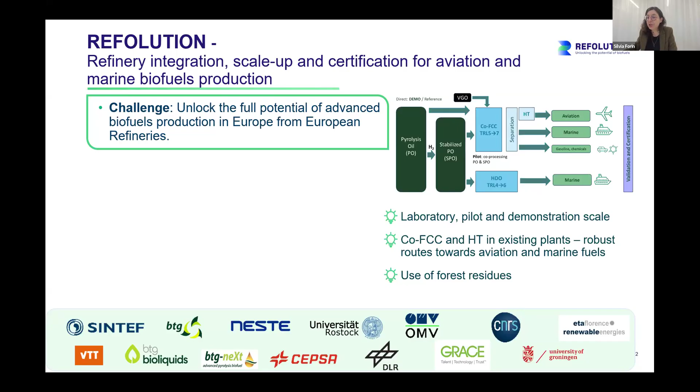These processes are tested in the project at lab scale, pilot scale, and demonstration scale. These different steps of production development are reflected also by the different project partners involved: a total of 14 stakeholders, universities, research and technology organizations like VTT and SINTEF, startups, and established players in the field, for a total of 8 EU countries represented.

The advanced biofuels developed in REFOLUTION are expected to have significant impact on sustainability, enhancing circularity and social acceptance of biofuels. The quantitative targets are to reduce the CO2 footprint by 60% and make advanced biofuels more cost effective by 50%.

VTT, in our work in REFOLUTION, supported these targets. First of all, we engaged in a responsible research and innovation process in which we involved societal stakeholders through information events. After this, our more technical work refers to the calculation of the environmental impacts of the developed biofuels, which also serves as an input for creating a sustainable business roadmap for advanced biofuels.

But which environmental aspects should be accounted for when we talk about sustainable fuels? Or put another way, what is biofuel sustainability? To find this out, we asked the REFOLUTION project partners and company stakeholders about their perception on regulations and on environmental aspects that are relevant in this sector.

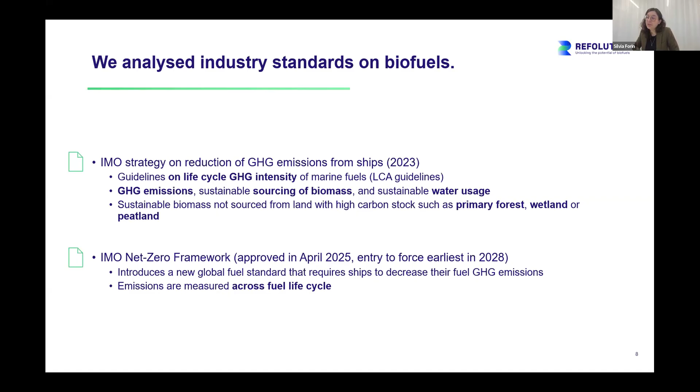It focuses on GHG emissions, sustainable sourcing of biomass, and sustainable water usage. It also explains that sustainable biomass shouldn't be sourced from land with high carbon stock, such as primary forest, wetland, or peatland. The newest framework is the IMO Net Zero framework, approved last year, but will probably enter into force only in 2 years. It introduces a new global fuel standard requiring ships to decrease their fuel GHG emissions, measured across their whole life cycle.

Besides very specific regulations and standards, we considered sustainability legislation in general and the role biofuels play. We looked at the Renewable Energy Directive, number 3, which establishes life cycle GHG emission saving criteria for biofuels and acknowledges risks such as land use change, deforestation, biodiversity loss, and risks to food security.

Important also is the EU regulation on deforestation-free products, which establishes sustainability criteria relevant for biofuels, bioliquid, and biomass fuels produced with forest biomass, as is the case in the REFOLUTION project. It explains there shouldn't be damage to biodiversity, soil quality, or long-term production capacity, and that forest regeneration must be guaranteed. It also sets a privilege for advanced biofuels from forestry waste and residues, and has social compliance targets and governance criteria such as land use rights, forest management, human and labor rights, and the rights of indigenous people.

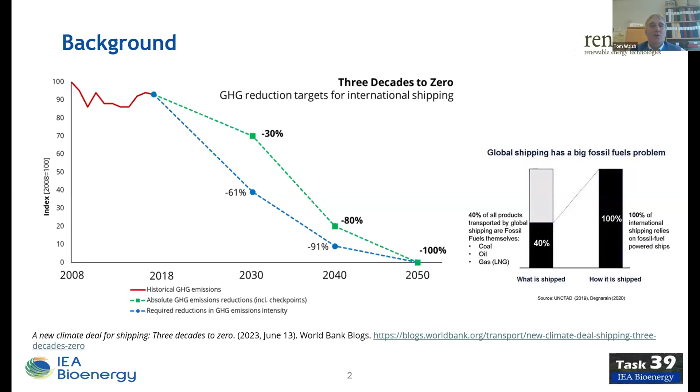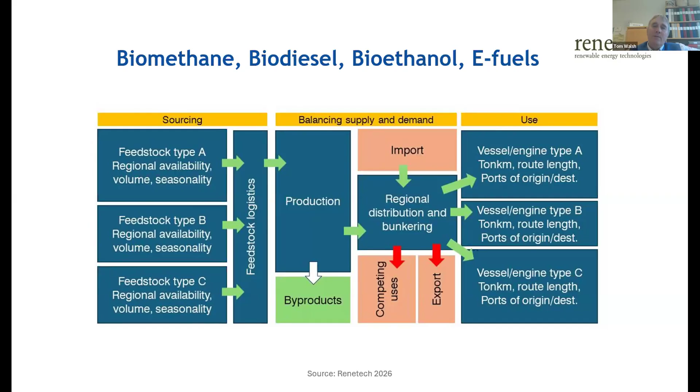And then finally, in terms of use, the maritime sector has different engine types. So you can use drop-in fuels. You have LNG ships that are geared towards the biomethane environment, but you also have heavy fuel oil, which is more considering the drop-in fuels.

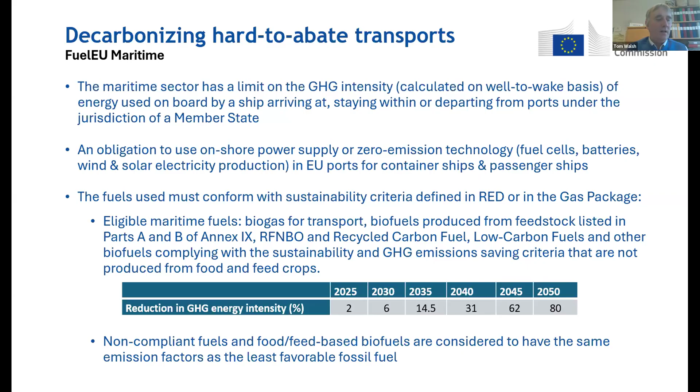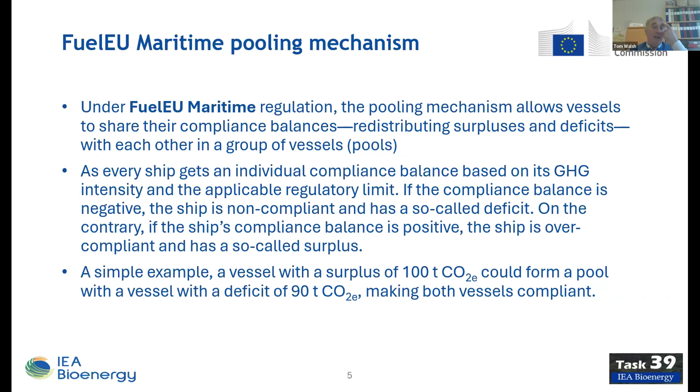Non-compliant fuels and food-based biofuels are considered to have the same emission factor as the least favorable fossil fuel. There is a pooling mechanism in the FuelEU maritime regulation, which allows vessels to share their compliance balances, redistributing surpluses and deficits. So as you see at the end of the slide, from a simple example, if one vessel has a surplus of 100 tons of CO2 and another vessel has a deficit of 90 tons CO2, they can combine the two vessels and make those vessels compliant.

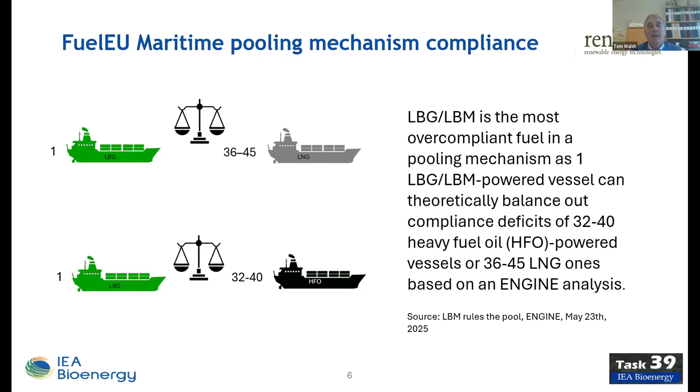This is showing it in another format - if there is a ship that is running on liquefied biomethane or liquefied biogas, it can provide compliance for 36 to 45 vessels running on LNG, or a similar figure for HFO, heavy fuel oil, which is 32 to 40. So this is what a lot of the vessel owners and fleet owners are working with at this particular point in time, and those fleets can go across different owners of fleets in order to meet the compliance.

And then, of course, we have to consider what is an advanced biofuel as well, as part of the energy directive - different feedstock types as listed in Part A of Annex 9 of the Renewable Energy Directive. This mainly includes lignocellulosic material, non-food crops from severely degraded lands, and intermediate crops. Then also residues like animal manure, sewage sludge, and different types of wastes and residues, which obviously would be going into the biomethane value chain.

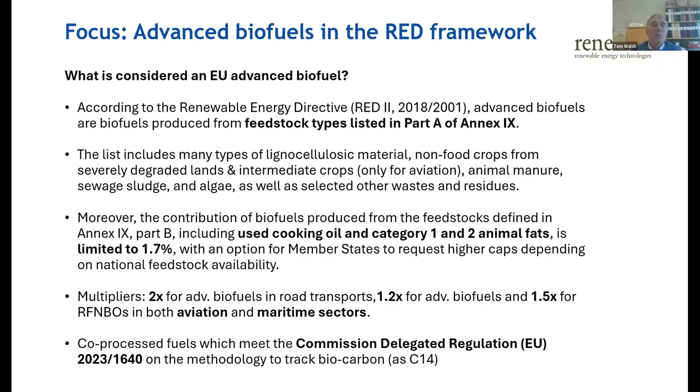So we can also consider feedstocks in terms of used cooking oil and category 1 and 2 animal fats, which would be coming from the rendering industry and also the cattle industry, sheep, pigs, etc. But this is limited to 1.7%. In terms of multiplier effects, renewable fuels of non-biological origin in both the aviation and maritime sectors do have a multiplier effect of 1.5 in the case of the maritime sector.

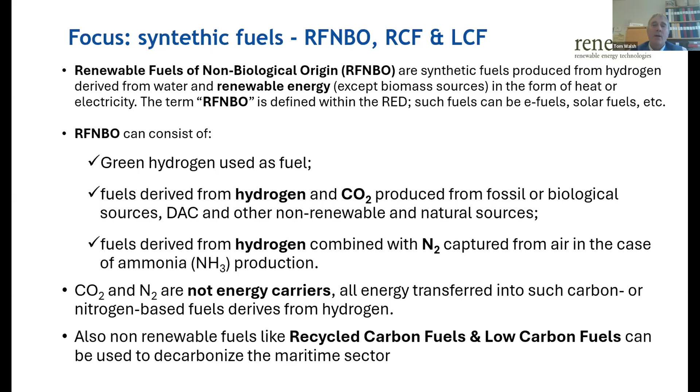They're renewable fuels of non-biological origin, and this is also a factor which is under development now. Probably we would consider it in terms of beaker to bucket to barrel to bunker. It's probably moving into the barrel area, with lots of project development happening for different facilities, and the combination of hydrogen and biogenic carbon. We can see that particularly in the methanol area - green methanol - that is an area that's developing quite rapidly.

Just to take those regulations into account, it's important to remember that this is a size of production and size of innovation scale for the maritime sector. It's beaker to bucket to barrel to bunker, and obviously the bunker area, you don't have that in every port. Some vessels, a lot of it happens in particular ports where the bunkering actually happens.

In the maritime sector, we're using 300 million tons of fuel on an annual basis globally. We need something like around 30 million tons of alternative fuels by 2030. We should also bear in mind that in terms of greenhouse gas reductions, energy efficiency is an important factor in terms of IoT, green corridors, and also slow steaming, etc., all of which reduces the usage of fuel and can actually make the vessel compliant.

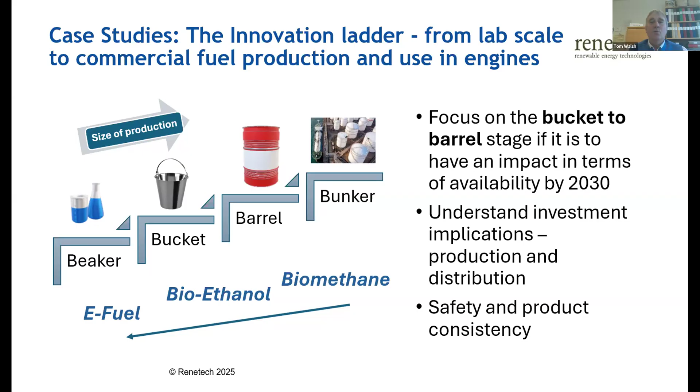There is still a lot of research going on in the beaker to bucket area. This is particularly like e-fuels and so on, but also other fuels. Bioethanol is not used extensively in the maritime sector, but in terms of scalability and availability, it has huge volume.

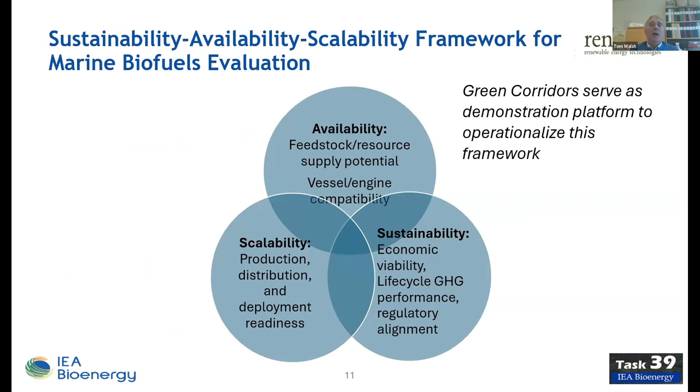Just to mention some of the areas to look at from a maritime biofuels perspective, you have sustainability, scalability, and availability - the SAS framework - and this is typically being implemented in the form of green corridors.

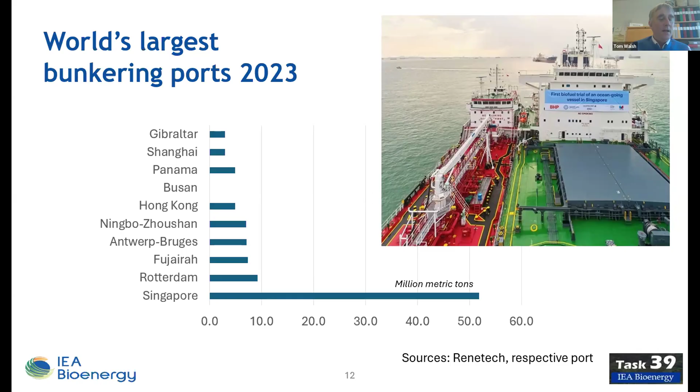To conclude, green corridors are an implementation mechanism for getting more green transport, and there are green corridors already implemented which are moving from Singapore to Rotterdam and other areas. This is a good mechanism to allow both the use of energy efficiency measures and alternative fuels from an implementation perspective.

Next slide, please. I'm talking about methanol in marine use. Next slide, please. To start with, let's see the whole picture, what is happening in fuels used globally, and then what is needed in the maritime sector. Today, fossil fuels are produced, composed quite much of methane.

If we think about these alternative fuels, methane is the dominating fuel, and this includes also biogas for energy production. If we look at the current bio and electrofuel production volumes, ethanol is dominating with 84 megatons produced. Then FAME, biogas, and renewable diesel. Ammonia and hydrogen are almost non-existing, while methanol is relevant at around 8 megaton production volume.

The prospects for 2030 are quite huge when compared to the current volumes, especially for ammonia and hydrogen - they should grow really fast. What is used today in maritime fuels, the biofuel that is used most is biodiesel and renewable diesel, but less than 1 megaton, so that is not much.

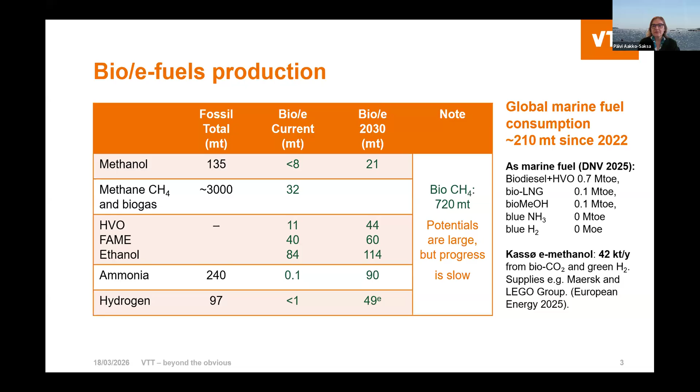And when coming to methanol, I would show you one innovative process to produce methanol in combination with methane. There was the UP-TO-ME project led by VTT, which got funding from a Horizon call for breakthrough technologies. Here is an example of a process where biogas is produced from a wastewater treatment plant, but it could be any biogas. Biogas contains around 20% CO2, and in this concept, methanol would be produced from the CO2. This concept was autonomous, self-optimizing, and compact technology.

And what comes to methanol use in maritime, everything is ready. The fuel standard, including 3 different methanol grades, was published in 2024 - ISO 6583. The most relaxed grade, MMC, would be interesting for e-methanol, since we could save some distillation costs when allowing a little bit more water in methanol. The question is how this would impact usability in engines, but we believe that the process water would not necessarily indicate the impurities which typically come from seawater in transportation.

And a lot of ships that are ordered today - 9.7% of the tonnage ordered - are already methanol ready. Wärtsilä and MAN cover the large ship engines very well, so engines are available. Enmar engines have a retrofit and single fuel concept for small vessels, and also a dual fuel retrofit concept.

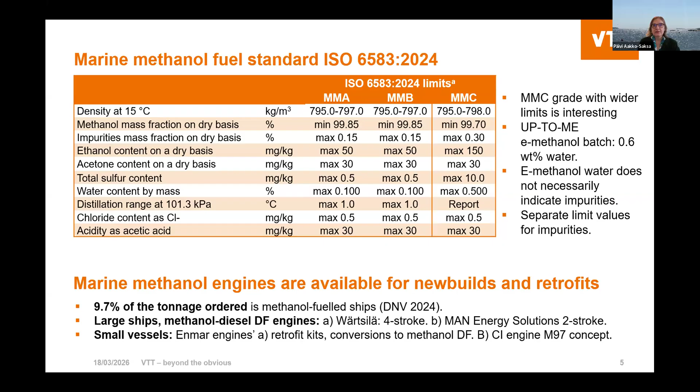In this UP-TO-ME project, there was e-methanol produced sufficiently so that we could demonstrate it. We used a high-speed engine from Enmar engines dual fuel kit - this was a kind of prototype Volvo engine, Volvo Penta, based on port fuel injection technology. There are also better concepts if modern diesel engines were used for retrofitting. But we could achieve 40% replacement of diesel fuel with this concept, and this e-fuel performed well. To note, the exhaust emissions from this type of engine were so high that exhaust after-treatment is necessary, and regulations should still meet this challenge and take this into account for these smaller segment engines.

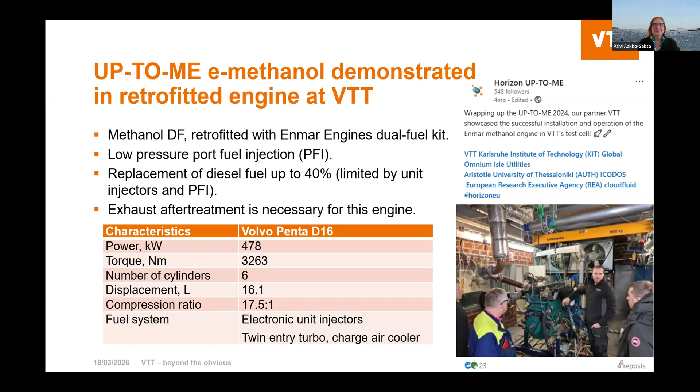So these were the plans on this e-methanol pathway for shipping, and so I will give the floor to you, Juha, now for other aspects. Thank you. Can you hear me?

Obviously, yes. So I will talk about something pretty close to the topic of the REFOLUTION project as well - one pathway from liquefied biomass to marine fuels. In general, there are many ways to liquefy biomass, and there are 3 main pathways: fast pyrolysis, catalytic fast pyrolysis, and hydrothermal liquefaction.

In all of those, there is a lot of oxygen still left after the liquefaction, and I would say that in general they are quite far from any transportation fuels still. On the other hand, there has been a lot of difference between those different bio-oils and bio-crude - fast pyrolysis oil with highest oxygen content, and hydrothermal liquefaction bio-crude typically with the lowest content of oxygen. Of course, there are many kinds of organic molecules with oxygen, making them a very complex mixture with challenging properties.

That will mean that the upgrading is typically pretty challenging. We are facing thermal instability of the oil causing catalyst coking, catalyst poisoning, even blocking of the reactors and so on, which makes it challenging. Therefore I think that standalone hydrotreatment upgrading of bio-oils has not really yet been commercialized to reach the qualities of transportation fuels like marine fuels.

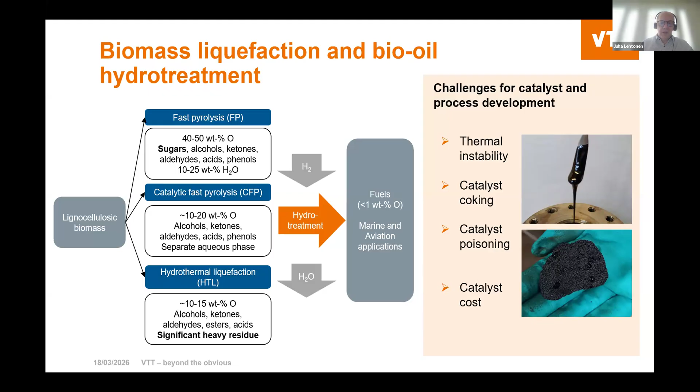Slurry hydroprocessing is a technology we have studied and are proposing for that - in that, we are replacing the first upgrading step, which is most challenging due to the instability of those oils. There we are replacing fixed bed reactor technology with slurry reactor technology, where finely dispersed catalyst is continuously added and removed from the reactor, which enables us to continuously add fresh catalyst and remove spent catalyst from the reactor, handling the deactivation-related challenges.

After that we get pretty stable oil because we can do that first stage upgrading at relatively high temperatures with relatively low oxygen content already, and then the rest of the upgrading can be done using traditional fixed bed upgrading to reach transportation biofuel qualities there.

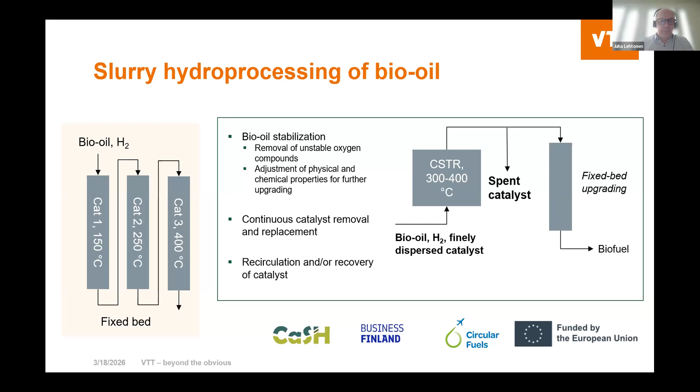So what we have done is we have had a lot of catalyst development for this slurry hydroprocessing upgrading, and also in cooperation with our partner RISE, we did kind of the proof of concept with our catalyst to show that it's a working way to treat those challenging bio-oils.

In this case we had fast pyrolyzed bio-oil as a feedstock, and in that 70 hours run we managed to remove more or less half of the oxygen, even much more, ending up with an intermediate which was stable and had oxygen content left at 10 to 15%.

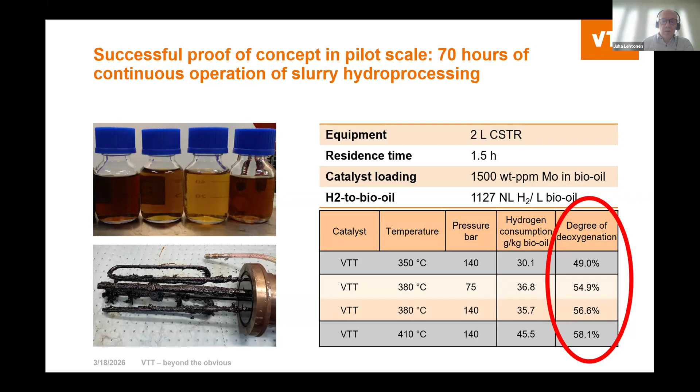So that's still an intermediate, which requires further treatment before it can be used as a transportation fuel. For maritime use, maybe it's allowed that a few percent oxygen is still left, but in this case we aim for really low oxygen content in the final product.

So more or less, in the next step we utilized that intermediate from slurry hydroprocessing, and did a second step upgrading by fixed bed hydrodeoxygenation using a sulfided typical refinery NiMo-CoMo type catalyst, reaching a pretty high degree of deoxygenation, close to 100%.

Also quite high conversion of HDN was reached there, even though there is very little nitrogen left when feeding that fixed bed hydroprocessing. What else?

Hydrogen consumption is kind of an indication of how efficient that upgrading is, and it seemed to be quite stable, indicating that no significant deactivation was observed during 160 hours of time on stream in the system. But anyway, let's look what we got there.

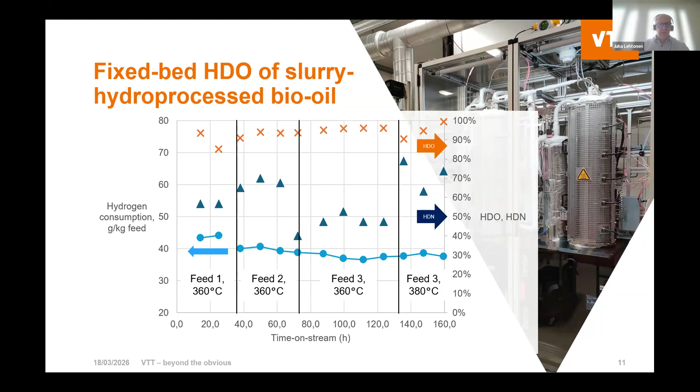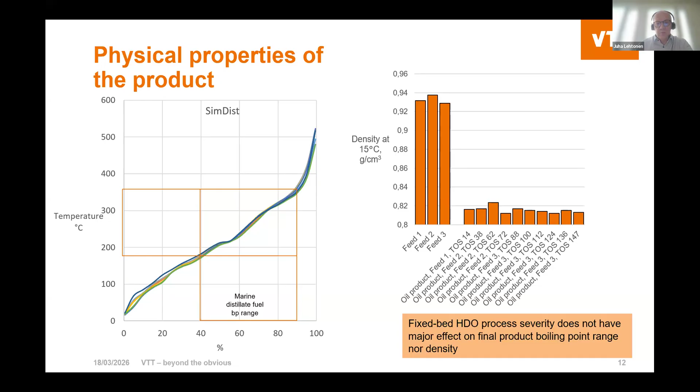So the rest of that, we have maybe 40% lighter, mainly classified as gasoline or naphtha, or some heavier residue that could maybe be used for residual fuel, but here we look at how it fits to the distillate fuel.

So far we have mainly looked at the oil product from the point of view that we would produce aviation jet fuel. So for this we distilled the product to the range of jet fuel more or less, but we are going to look more at the properties of the oil for marine fuel.

As you can see, what we got is kind of a pure hydrocarbon fuel with very low sulfur and so on, and very nice cold properties and so on. So I would say that it's pretty good fuel as well for marine distillate fuel, that fuel which we got there.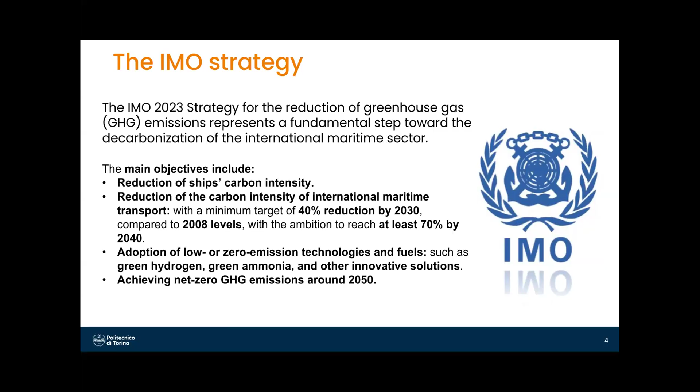But again, the real discussion today is about the net zero framework - the possibility to really reach in 2050 the net zero for the sector. The discussion is ongoing because the MEPC that revised the strategy in MEPC 80 then continued the discussion and proposed a net zero that was initially approved, but then in October 2025, some members of the MEPC opposed basically the current structure.

And therefore the discussion was entirely postponed to 2026. So we are living in a kind of transitional period in terms also of clarity for the operators with respect to the overall target. And this is clearly a relevant point for people that need to invest in the short term.

And this is clearly linked to the role of alternative fuel for marine fuel, in the sense that with respect to the need of decarbonizing the sector, every single study available identified clearly alternative fuel as a mean to enable this transition. And this with respect in particular to the greenhouse gas reduction potential - the greenhouse gas reduction is, I would say, the key driver for considering alternative fuels into the system, again with respect to the need of decarbonizing the sector.

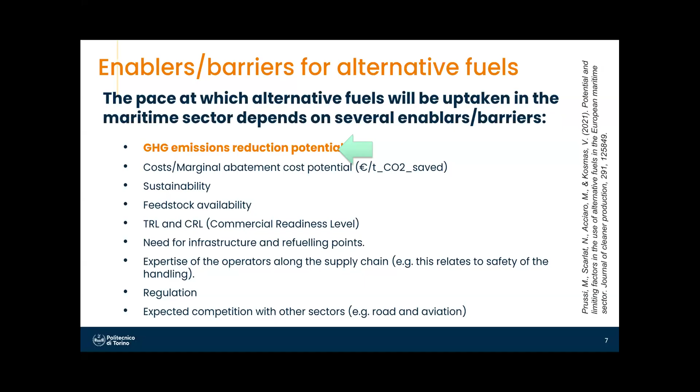In my presentation, what I would like to stress is that we are living in what I typically define a policy-driven moment of the transition, in the sense that only policy can really support the transition, through instruments that allow to close the gap that today exists with respect to traditional fuels - in terms of costs, availability, infrastructure readiness, etc. There are clear gaps that need to be covered, and the market per se will not solve this as of today. I will show you some examples in terms of costs, for instance, the issue.

To that extent, it's key what MEPC endorsed - the guidelines for LCA of maritime fuel, because again, the driver is the greenhouse gas saving, and this is one of the most relevant elements so far of considering alternative fuel into the system for the transition of the sector. Therefore having a tool to clearly demonstrate these advantages allows operators to be able to calculate the carbon intensity of each batch of fuel.

It's a key element of the discussion. IMO endorsed the LCA guidelines, which basically adopted a well-to-wake approach. So we have a part purely related to the fuel, called well-to-tank—from feedstock cultivation up to bunkering of the fuel. And then we have the uptake into the ship, the tank-to-wake part, related to the efficiency of the ship.

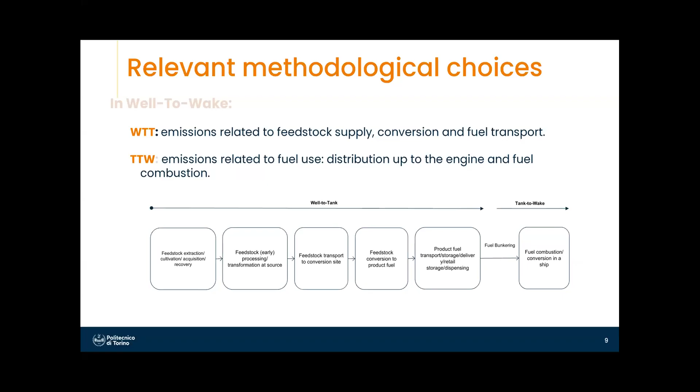The overall effect is what counts—the combination between the fuel and the innovation related to ship fuel usage, particularly if we talk about alternative fuels for the sector.

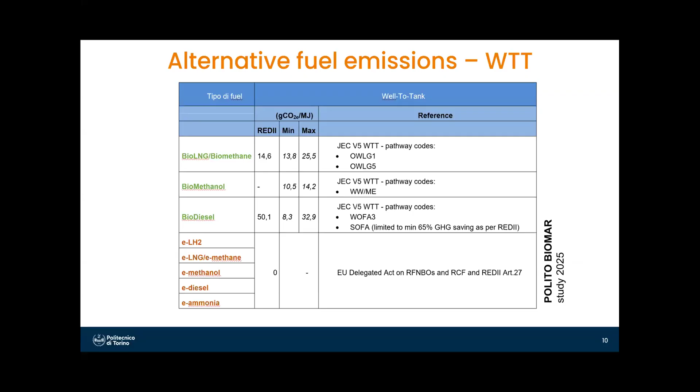In order to stay on time, here there is a study we did at Politecnico last year, in which we compare the greenhouse gas saving using a tool we have at Polito, leveraging relevant studies like the JEC study version 5, and the Renewable Energy Directive, gathering information about the potential saving of various bio and e-fuel alternatives—power to liquids, referring to e-fuels. We put this information together with the costs.

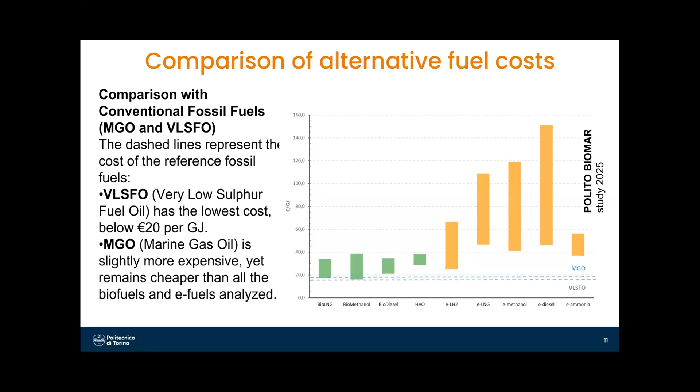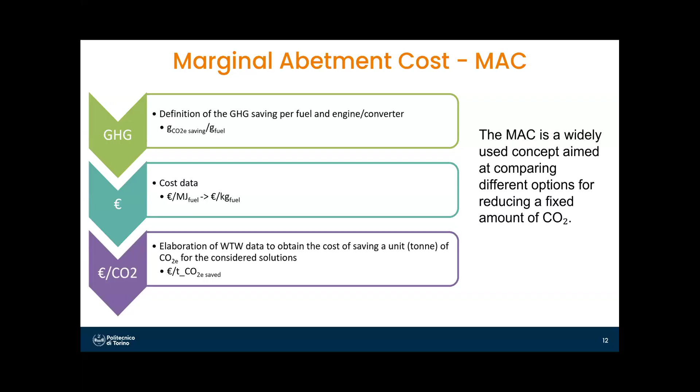This is particularly relevant even for biofuels, but more so if we move toward e-fuels. This is an exercise I always do and like a lot: if we put together the greenhouse gas saving potential—grams of CO2 saved per megajoule—with the cost in euro per megajoule, what you get is the euro required to save one ton of CO2, to achieve the goal in a decarbonization scenario. How much does it cost for the different solutions?

What you can see here is that there are options—this is the well-to-wake analysis, so the cost without considering the retrofitting of the ship. It's missing a large part of the discussion, but it's the first result you get when you compare biofuel used in certain types of engines. The green solutions are the bio options and the orange are the e-fuels. There are few options that today provide saving at a reasonable cost.

What we got is a confirmation of what we've observed in terms of interest by the industry, namely the biodiesel option, but lower than biodiesel is biomethanol and ammonia. Ammonia is the only e-fuel that might be competitive with the bio alternative if we don't consider the need for retrofitting the ship—so a large part of the discussion is still missing.

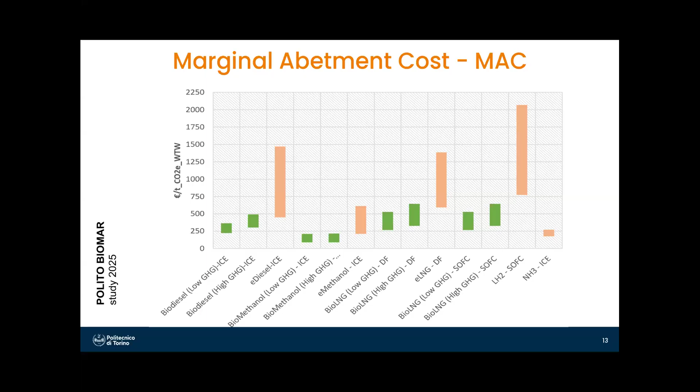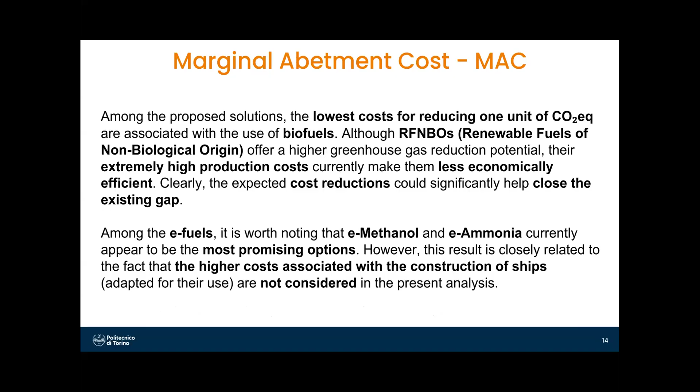I rushed a bit, I'm aware of it, but in ten minutes it's very challenging to present the status of the policy and how the policies are working today—to enable the transition, because somehow I'd say the target is clear. What is not necessarily clear is the pathway forward.

This is not fully true for the European regional context, where FuelEU Maritime allowed for such a vision in terms of pathway, while in IMO there is strong discussion on how to reach the targets. Clearly, however, the alternative fuels are a solution—or better, part of the solution—which is the problem that today cost is the main gap.

It's not the only one. For some alternatives, we also need to talk about infrastructure, which can however be understood through the final cost for an operator adopting a certain solution. Therefore, policy support is absolutely needed at this stage.

It's where I want to stress and close my presentation saying that if the target is there, where we have to navigate—so where the island is—it's fairly clear. If the path is not clear, it's difficult to see real-world investment materializing, and we really need to increase investment in the alternative fuel sector if we want real volumes in the market, because there is a gap between the potential demand and the potential in terms of production as of today.